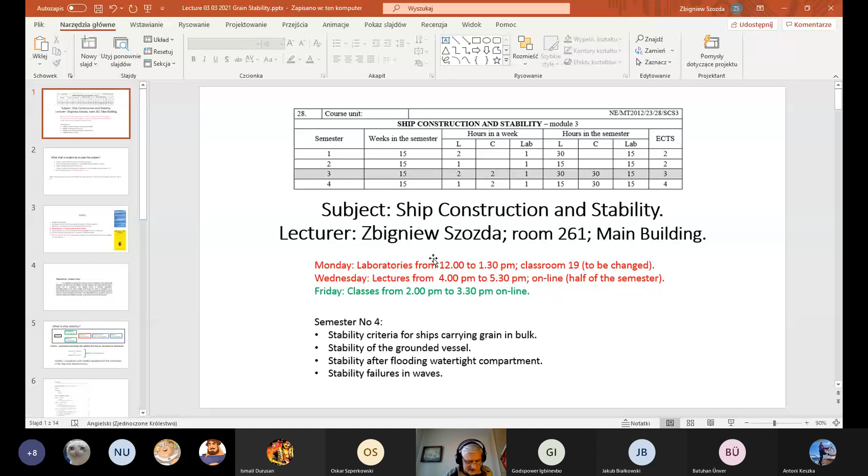Maybe 2 or 3 sentences about the structure of the semester. I know we discussed this when we met on Monday, but just to recall: semester number 4, 15 weeks in the semester. And what is the structure? Lectures, classes, and labs. 1 hour per week of lectures, 2 hours classes, and 1 hour laboratories.

Last time, on Monday this week, we did agree that we will meet all Mondays, starting from the first week to the last week. For the time being, we have classroom number 19, but I would prefer to change the classroom to another one, just to have the opportunity to have space or resources to use a computer at the end of the semester.

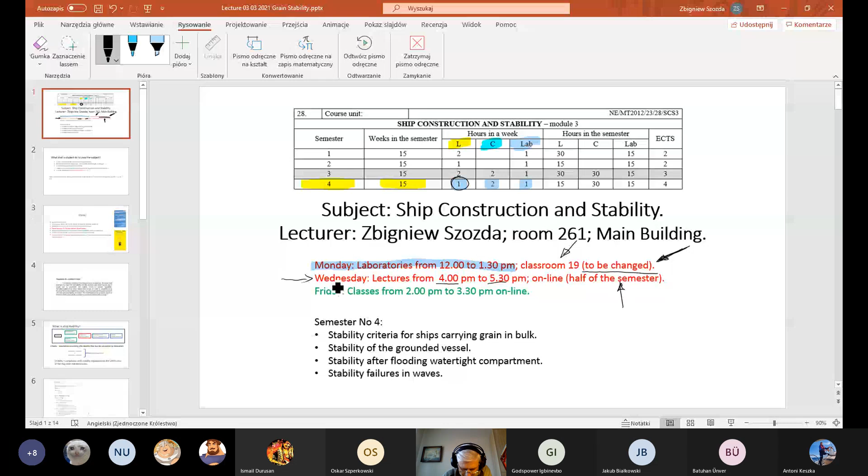Okay, then Wednesday, like today, lectures starting from 4 p.m. to 5:30 p.m. online. Please note, because there is 1 hour per week, if we start today and continue week by week, we will finish at the half of the semester. So please remember about this. The proposal was to have lectures week by week, and if we do so, we will complete the lectures at the half of the semester.

And this is my understanding of the conclusion from laboratories, and please confirm whether I am right or not. It means whether you have other obligations next Wednesday at that time, or you are free and we can continue week by week. Please confirm or say it is not possible.

Anybody? Hello, sir, please, can you repeat? I don't understand what you are asking. What are we confirming, sir?

Okay, so we have 1 lecture per week. But if we have lectures like today on Wednesday, starting from 4 and finishing at 5:30, so now we do 2 hours per week. If we do so continuously, we will finish lectures at the half of the semester. My question was, is it possible? Just to confirm, I did understand from Monday's meeting that it is possible for you to continue Wednesday, 2 hours, week by week.

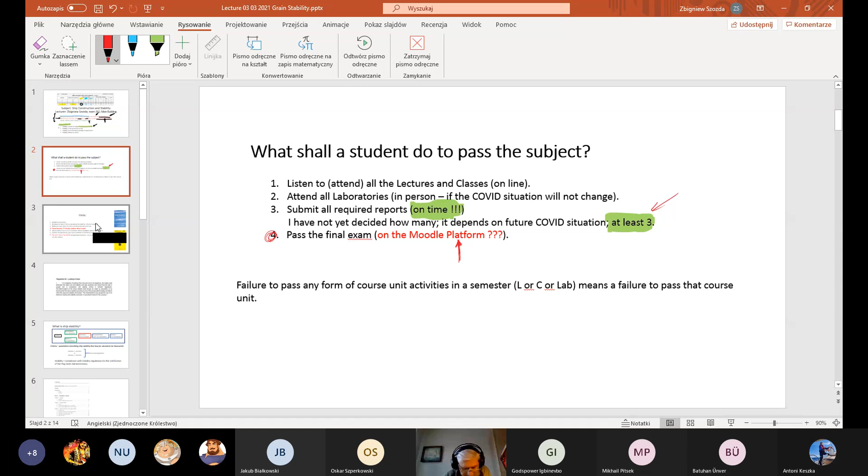Okay, what else did I prepare? This is the slide taken from previous semester. So what I suggest to do during this semester: first of all, keyword passion. Secondly, be always on time, not to postpone the task to the next week. So, for example, if we take today...

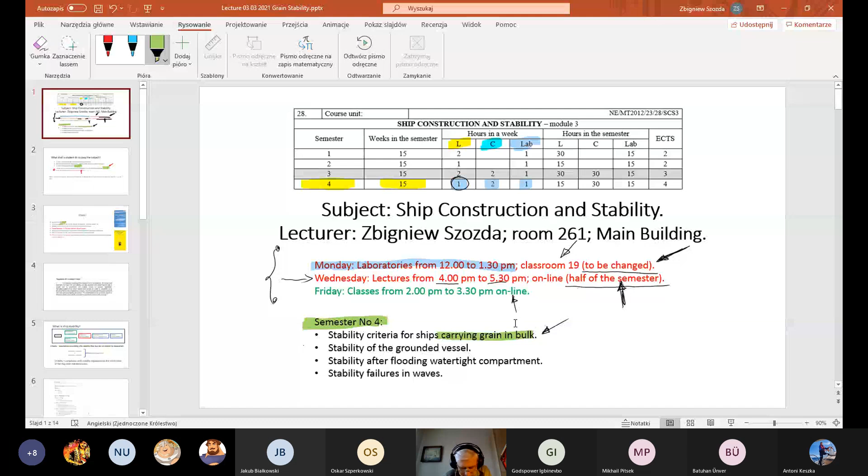Stability criteria for ships carrying grain in bulk - please be sure this Saturday or Sunday you do really understand the criteria for carriage of grain in bulk.

Make your notes. It is very important to have notes. If you make notes, you study and learn at the same time. Do all exercises by your own. For example, like last Monday, if you did your exercises by your own, you have added value - you really understand what is going on. If you just make notes following your colleagues, maybe the added value is not so big.

Okay, books - it is very important. If you have any book you can read related to our subjects, please do it. Two examples are shown on the screen.

If you don't understand anything, please ask questions. Asking questions has at least 2 advantages. First of all, I will answer your question. And secondly, this is also feedback for me. I'm talking now about a group, not a particular student - if you ask questions, it is also information for me about what I should stress in the future.

And of course, you have colleagues, and you can discuss different problems, different issues with your colleagues. Exercise and practice by your own, in addition to the mandatory task. If you feel that you would have added value if you calculate something by your own, please do it.

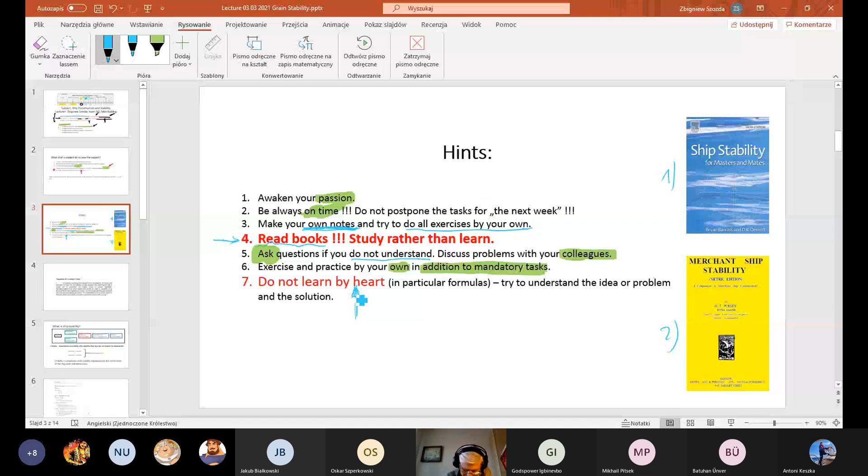And the last but not least, do not learn by heart. Don't learn by heart - you know my approach to our subject, we discussed this at least a few times. Try to understand the problem. I can remember you told me: if you have a formula, you will solve any problem. And then I gave you the formula like that, and we discussed what does it mean. It does mean nothing.

If you don't know what X means, what Y means, what Z means - it is at the same time the formula for how to calculate trim, TF minus TA. It is at the same time the formula for how to calculate righting lever, how to calculate initial metacentric height. It is the same formula for calculation of righting lever - still it is something minus something. Okay, the most important is to understand what X means, what Y means, what Z means. I hope you did catch my view.

Don't learn by heart. If you know what trim means, the formula for how to calculate trim is obvious. Okay, so it was my hint, and I reminded you because we discussed the same slide starting in semester number 3.

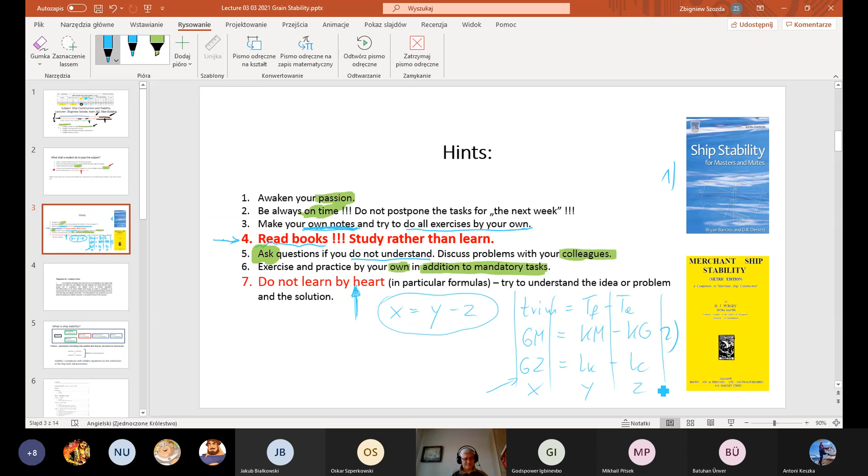Okay. So let us start with the problem, with the task. Now I show you Regulation 20. This is Regulation 20 taken from the SOLAS Convention.

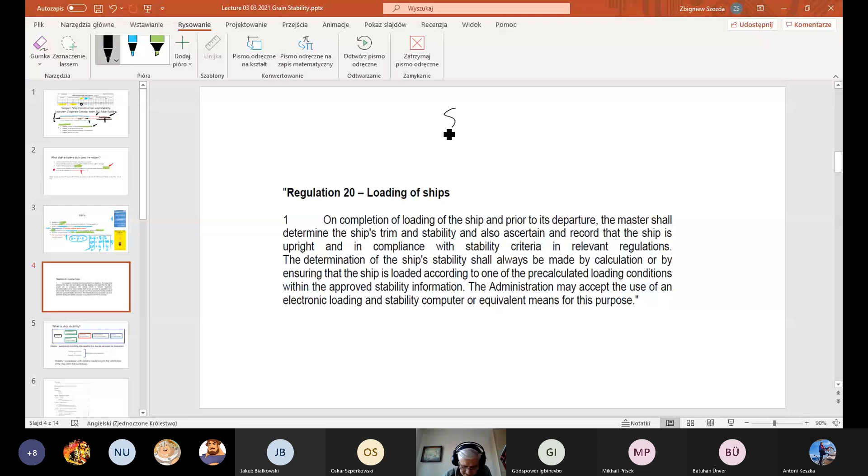And you should remember it, not necessarily word by word, not necessarily the wording, but the idea hidden behind this regulation. The master - it means you. It is my first keyword here. And in my opinion, from the perspective of today's lecture, the ship is in compliance with stability criteria in relevant regulations - and I would highlight relevant regulations for the purpose of this lecture.

What does it mean that the stability is correct? It means that you can, by calculation, ascertain by numbers - it is very important, by numbers - that stability criteria are satisfied. The ship is in compliance with stability criteria in relevant regulations. So this is also something what I wanted to stress and remind.

The next thing I wanted to remind from the last semester, number 3, is the question: what does it mean, stability, from our perspective, at least from today's perspective. And the definition I invented of stability for our purpose.

Stability, what does it mean? It means compliance with stability regulations. The ship is stable, the ship is safe. Maybe I should say the ship is supposed to be safe, prior to departure, if the loading condition, the shape of the hull, is in compliance with stability regulations.

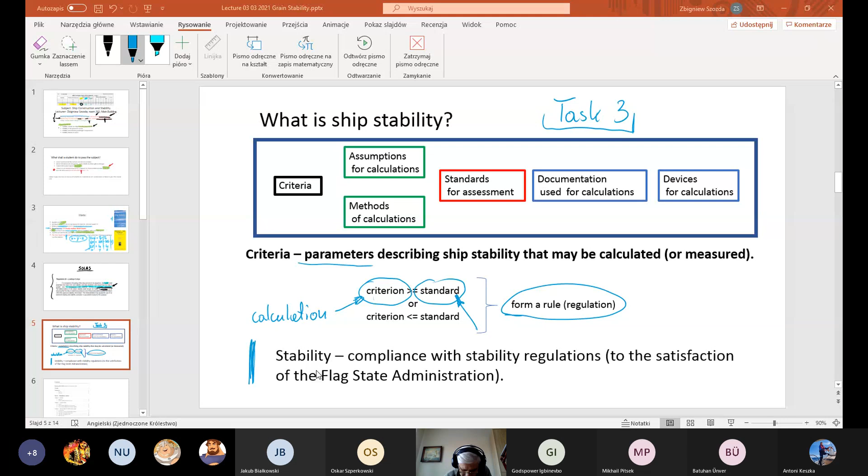Now I turn to a group who is the first on my list. The first is Robert Kipkacz. Robert, can you hear me? Robert Kipkacz, please say something. We can hear you, sir.

Yes, fine. The question goes to you, just to make sure everybody understands the structure. Could you please name any criterion taken from the previous semester? Can you name a criterion? What does it mean, criterion here? Just to check whether everybody understands what it means, criterion in this structure. Could you name a criterion?

Any? So, one of the criteria is area under the GZ curve between 0 degrees and 30 degrees. Then the standard is that the area should be greater than or equal to 0.055 meter radian. Very good.

So now you told everybody, assuming that maybe there is a student who didn't catch the point, what it means, criterion in this structure, and what it means, standard. Very good, thank you very much for doing this. Criterion, for example, area under GZ curve, and the standard is, like you said, 0.055 meter radian. This is understanding of this structure.

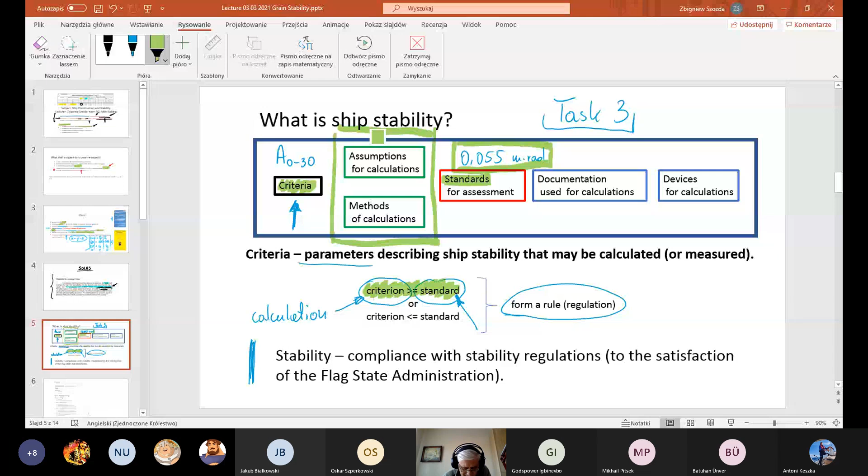Okay, assumptions for calculation, method of calculation. I hope you understand at the same time what it means, assumption, what it means, method. For example, defining the GZ curve, defining righting lever, we assumed that there are only two forces acting on the ship: weight and displacement. This was the first assumption we made during the third semester. This is a kind of assumption.

For example, we assumed that if you calculate the GZ curve, you have to previously calculate the vertical position of the center of gravity, KG, and multiply it by the sine of the angle of heel. One of the assumptions is that the vertical position of the center of gravity takes into account the free surface correction, which we calculated and discussed during Monday's laboratories.

So, for example, this is the next assumption for the calculation. If you want to take into account the phenomenon related to free surface, to liquids in partly filled tanks, we may assume that this phenomenon is described by the so-called free surface correction. I would recall the discussion of what it means, inertia moment of a surface, and so on. Method of calculation: if you calculate the area under the GZ curve, during last semester we used the trapezoidal method for this purpose.

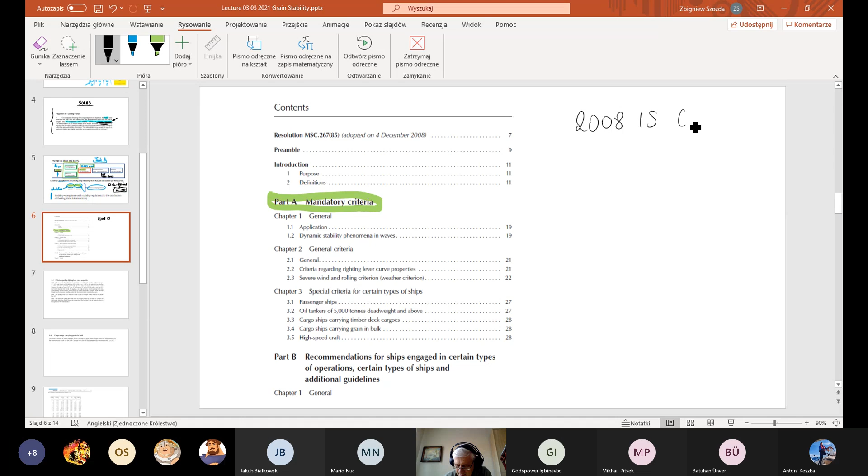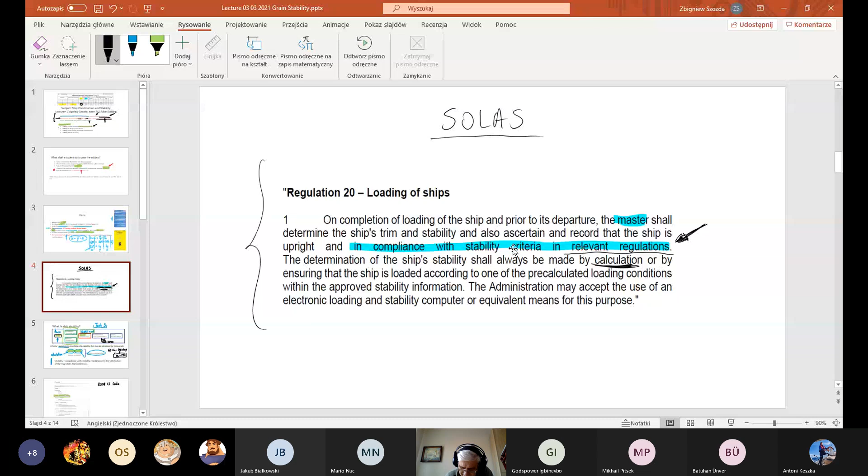Now I copied for you the content, actually part A, the content of the 2008 IS code. So I hope when I read this regulation number 20 and I stressed criteria in relevant regulations, I hope that you thought that probably relevant regulations, it is 2008 IS code, intact stability code, international code on intact stability of ships.

Okay, and I put here the content. This number, resolution number MSC.267, this is the number of resolution containing the code.

Please confirm, I am not sure at the moment, please confirm you can read words on the screen. Are the letters big enough to read? Yes, sir. Okay, yes, so they are. Super, thank you.

Okay, so content of the 2008 IS code, general criteria, chapter number 2. Chapter number 1, it is general statements like application, information about the dynamical stability phenomena in waves. If you follow me, waves and dynamical phenomena, this is the last issue we take on board during this semester. Okay, so we'll come back to this probably in May or June.

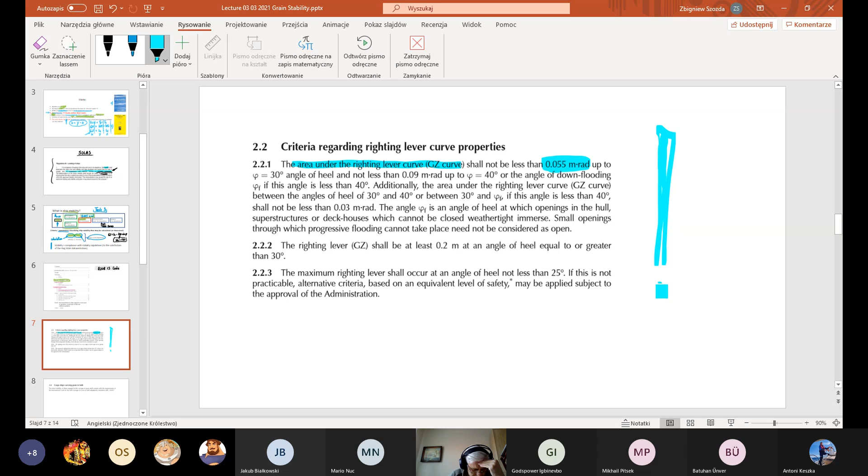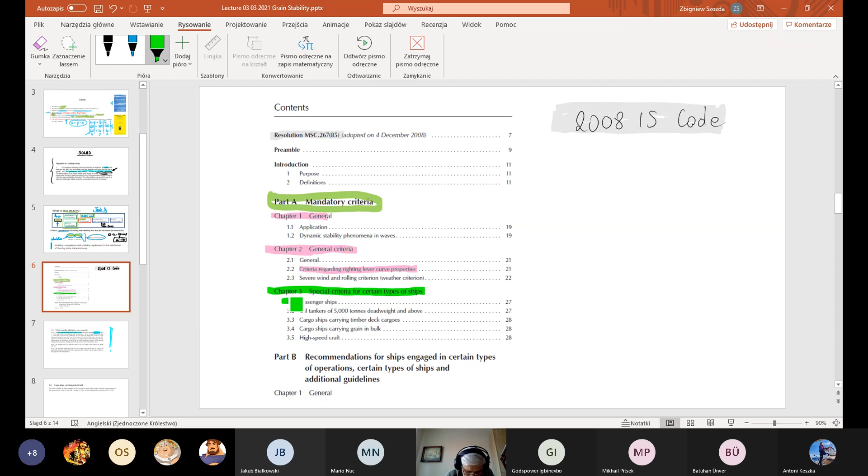But, and now I change color to green, there are special criteria for certain types of ships contained in chapter number 3. So chapter number 2, general criteria, applicable for all types of ships, and there are special criteria for certain types of ships. And if I remember correctly, last semester we discussed passenger ships criteria.

There was angle of heel caused by passengers crowding on one side, and there was angle of heel for ship in turn, and probably abbreviation here was phi R. So two criteria related to passenger ships. You can see the list.

The list consists of 5 types of ships: oil tankers, cargo ships carrying timber deck cargoes, and 3.4, cargo ships carrying grain in bulk. Cargo ships carrying grain in bulk.

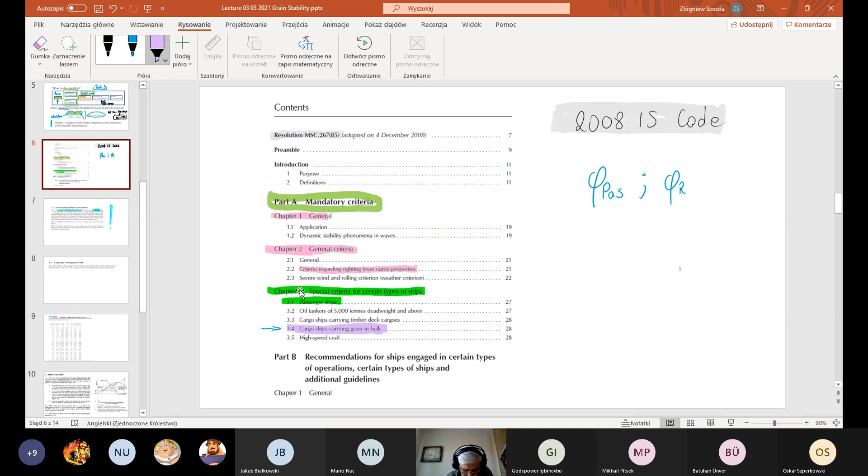So this is the problem for today. Special criteria for certain types of ships, and we focus today on cargo ships carrying grain in bulk. Grain in bulk. Chapter 3 and paragraph 3.4. Cargo ships carrying grain in bulk.

Now I will stop for a moment and ask the question. Now I turn to the group. Here at home I changed tablet from the presentation to Teams, and I turn to the group with the question, did you catch the point? Do you understand correctly where we are now? If you have a question, please ask.

I tried to follow to some extent knowledge from semester number 3, to summarize it from the main point, and now I'm intending to open a new chapter, criteria for grain in bulk. But before I do it, please tell me whether you understand the point or you have a question, just to be sure we are on the same footing.

No questions? Yes, sir. We catch the point about angle of heel caused by crowding of passengers and angle of heel when the ship is turning. I think we all catch the point, sir. So I'm not sure if I understand you correctly. So you confirm that you understand where we are now. Am I right? Yes, sir.

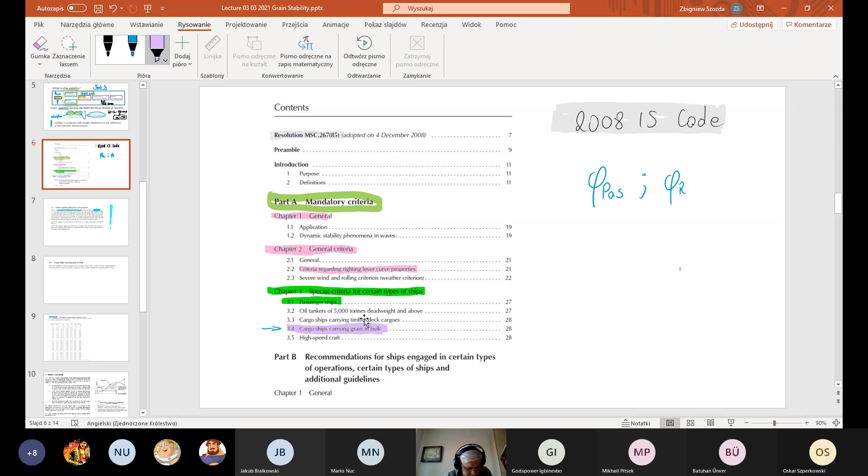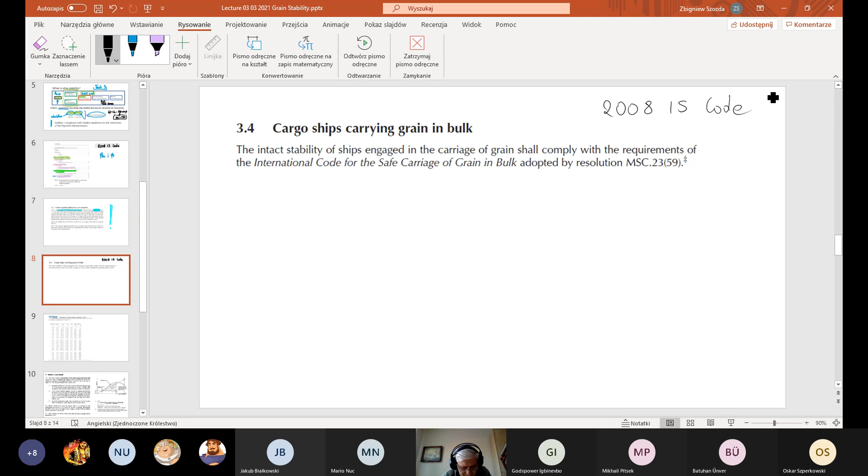Yeah, okay. So now we open a new chapter. We open chapter, criteria for ships carrying grain in bulk. And if you open the code, 2008 IS code, intact stability code, you will find that paragraph number 3.4, cargo ships carrying grain in bulk, is very short. Just one sentence.

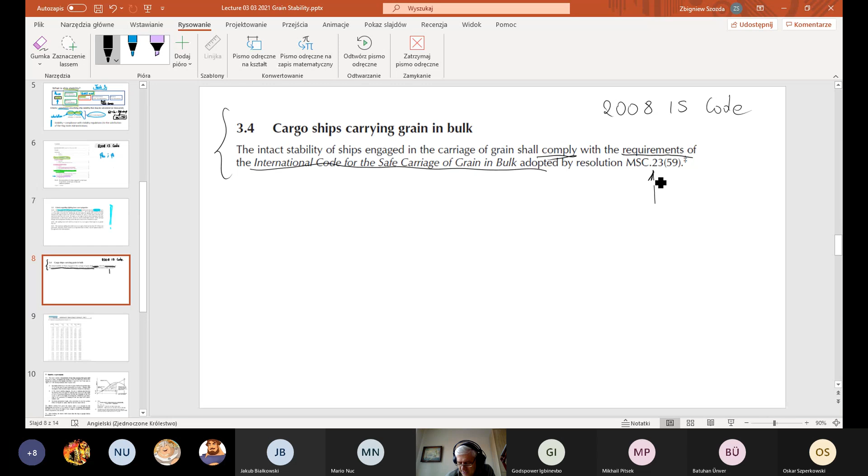The intact stability of ships engaged in the carriage of grain shall comply with the requirements of the International Code for the Safe Carriage of Grain in Bulk, adopted by resolution, and here you can see the number of the resolution.

So if you want to learn, if you want to study stability requirements for ships carrying grain in bulk, you should turn to the International Code for Safe Carriage of Grain in Bulk, adopted by MSC. Do you understand the abbreviation MSC? What does it mean? And the number of the document is 23/59. Do you understand MSC, this abbreviation? This is a question to you.

No, sir, I don't. Please, what is MSC?

It is Maritime Safety Committee. Safety. Okay, so... T. I'm not sure it is correct in English, double T or one T. Okay, it doesn't matter, it is not so important now.

Maritime Safety Committee. This is the committee of International Maritime Organization. International Maritime Organization consists of a number of different committees. One of them is Maritime Safety Committee, MSC, and this is the number of the resolution developed by Maritime Safety Committee. So this abbreviation is related to the structure of International Maritime Organization.

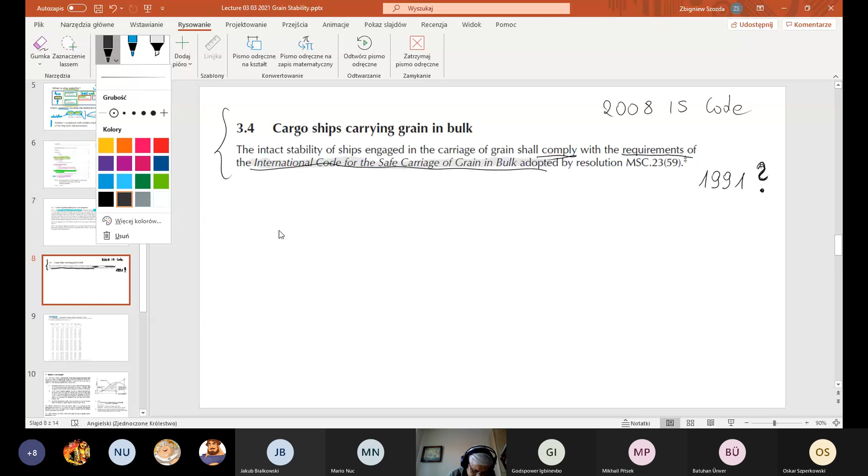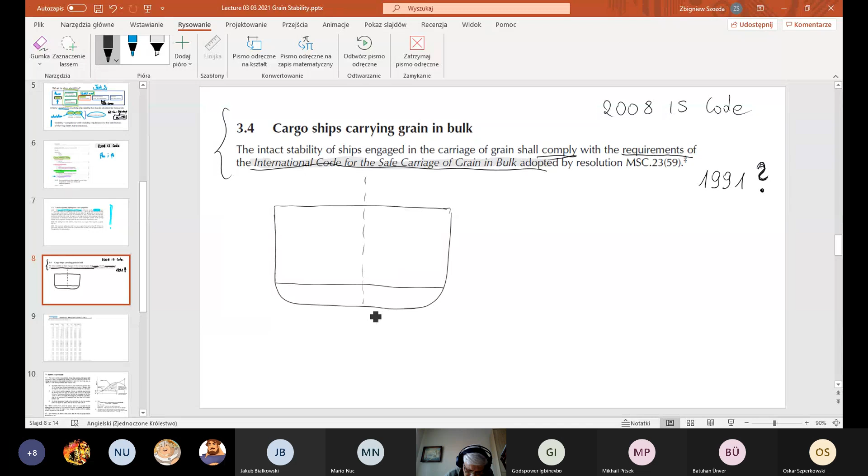What is the problem? The problem is very simple. If you have grain cargo in a hold, I'm trying now to show a hold. For example, it will be double bottom here, central line, keel, baseline, okay. And I change color to yellow. I will fill in the hold with the grain cargo. The hold is filled in with grain, and the hold is partly filled.

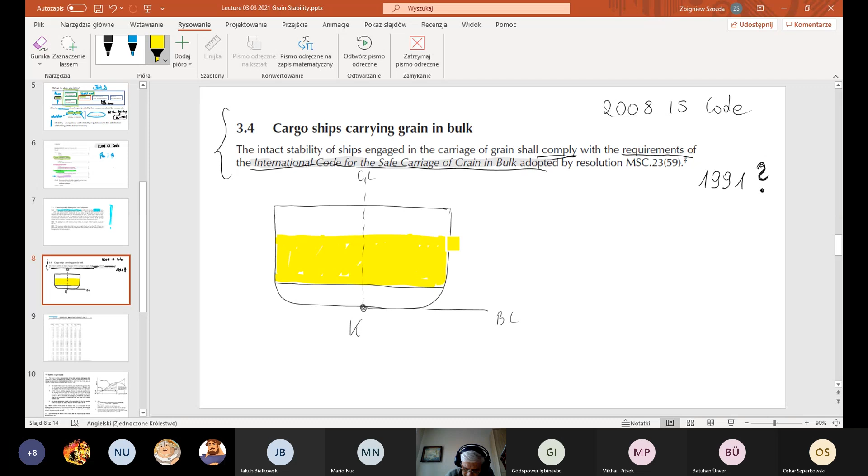And what is the phenomenon that we have to take into account? After some time, let's say two weeks of sailing, the surface of such grain in bulk in a hold will change position, and the new position will be like that. The grain shifts from one side to another side. It takes some time during the journey, for example after two weeks.

After some time, even if the grain cargo in the hold is trimmed, the surface of the grain cargo is parallel to the baseline on departure. Even if so, after some time, a volume of grain cargo changes position. The grain cargo shifts from one side to another side. Can you imagine such a phenomenon? It is important at this stage that you can imagine it.

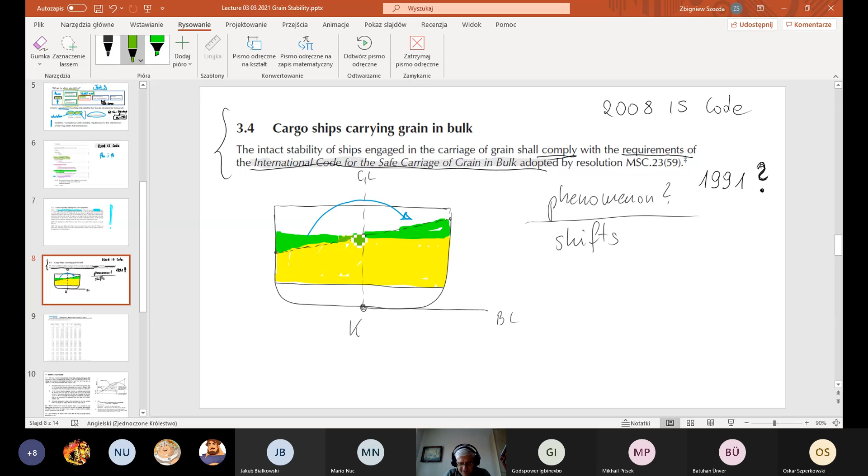At departure, you start your voyage with the level of the grain cargo, with the surface parallel to the baseline. You did load the hold evenly with grain cargo, but after some time, due to wave action, due to vibration of the hull, and due to accelerations of movements, different accelerations, angular, linear, some amount of grain cargo changes position. Cargo shifts from one side to another side, and this is the phenomenon. The grain cargo shifts from one side to another, and this phenomenon shall be taken into account if you assess whether your ship is safe or not from a stability point of view. It is very important to take this phenomenon into account.

Okay, and what parameter describes the phenomenon? The Maritime Safety Committee, MSC, introduced a new parameter which is called volumetric heeling moment. Volumetric heeling moment is the number that describes how much cargo can shift on what distance.

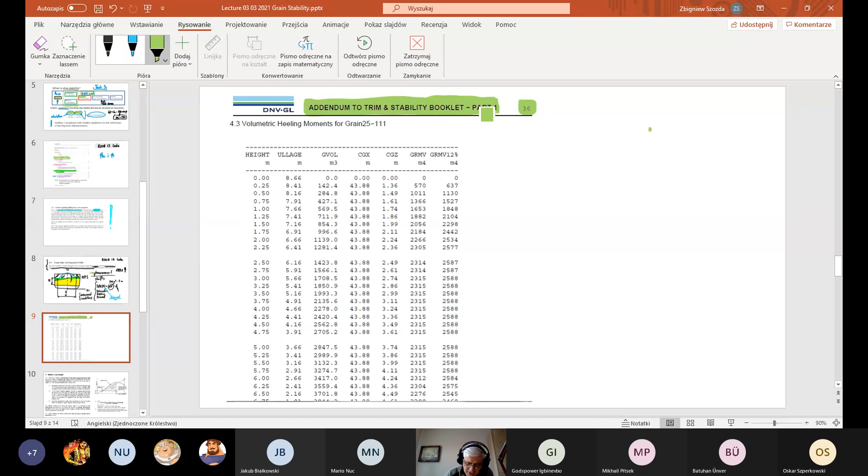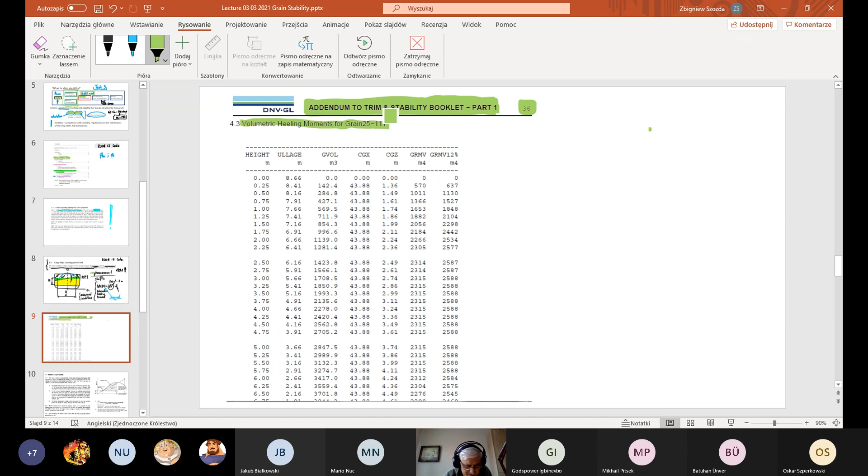Now I show you on the next slide, page number 36, addendum to trim and stability booklet, part 1. This addendum you may take from the Moodle platform, because I put this addendum there during the last semester. You can see page number 36 presents volumetric heeling moments for grain, and 25, 111, this is the position of the bulkheads.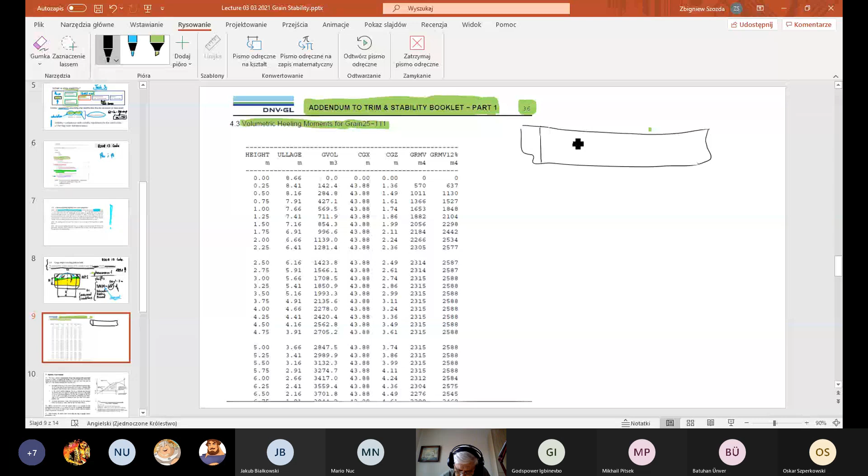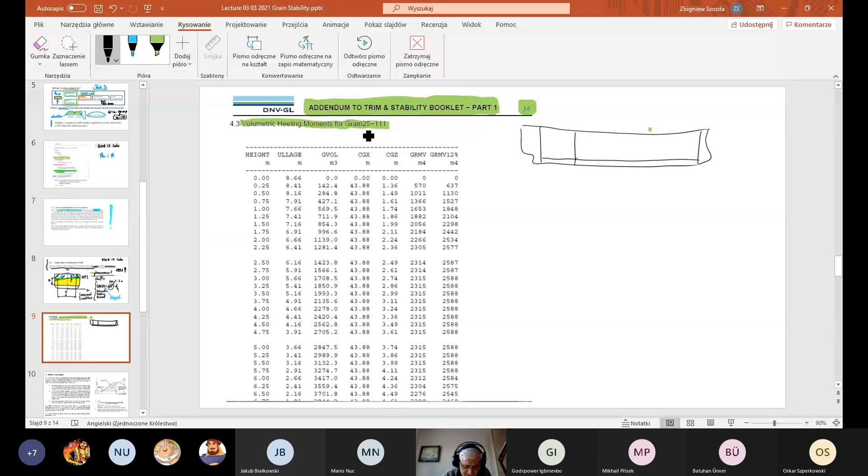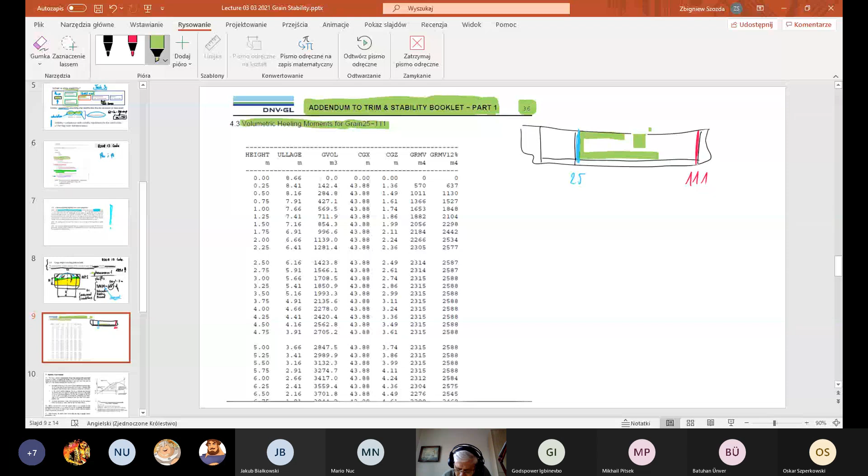Here, for example, that ship has movable bulkheads, so the bulkheads you can move. This is position of the bulkheads, at frame number 25. This is starting point, for example here, 25, and the next bulkhead is frame number 111. So the space, which is limited by the bulkheads, is like that. And for such space, they calculated.

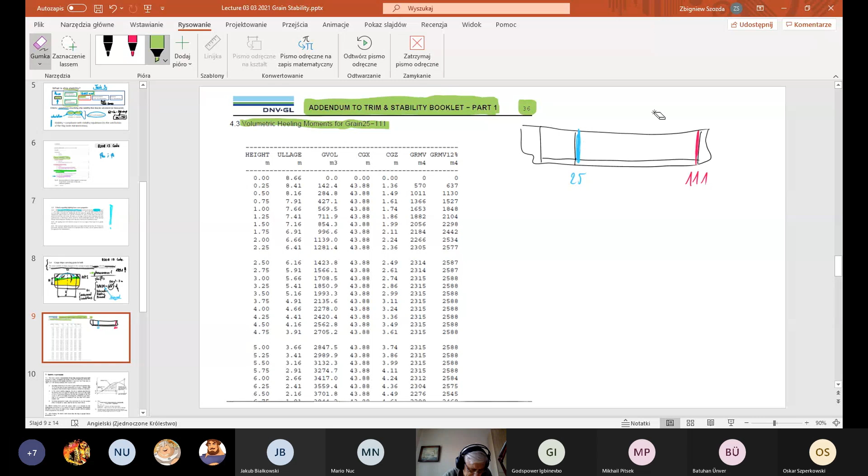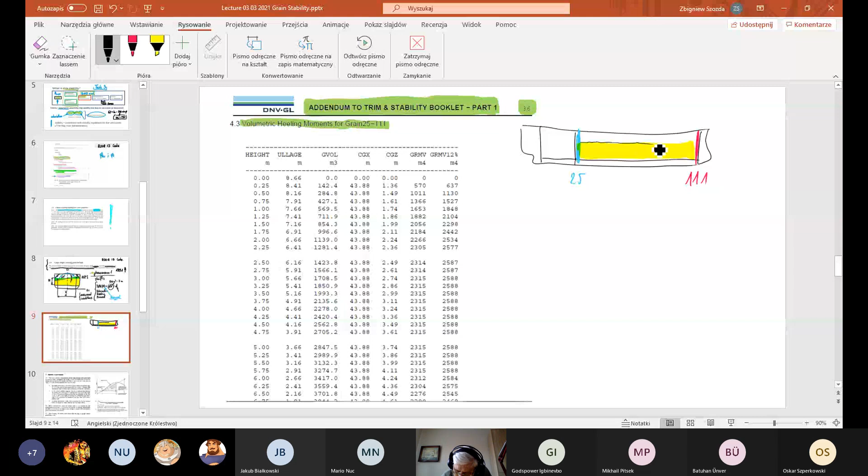Maybe I will change color, because I used yellow as grain cargo, and I will leave the hold filled partly, let's say 65%. So the level of the cargo in the hold is like that. Height, I will put H here. This is the distance between the tank top, double bottom, and the level of the cargo in the hold. This is H.

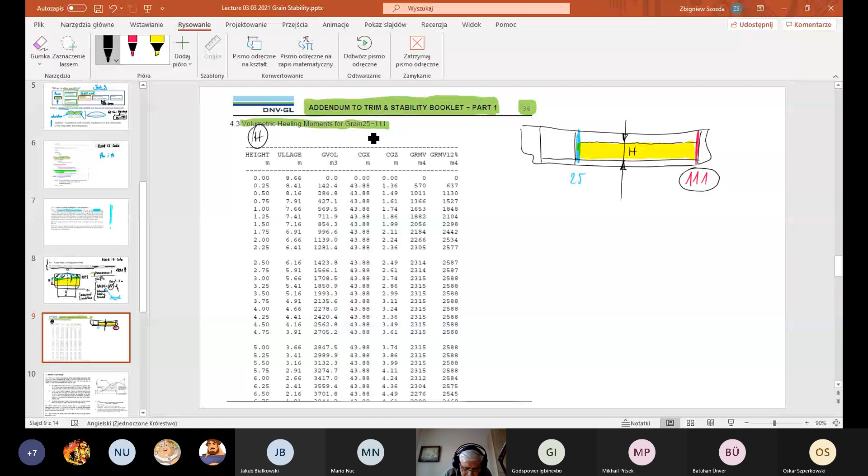111, this is the fore bulkhead. 25, it is the aft bulkhead on our ship. And the table developed by the shipyard, by naval architects, calculated, contains information about different particulars of the hold. Height is the first one. For example, height is, let's say, 5 meters.

Ullage, yes, this is the distance between the deck and the surface of the cargo. Yes, that's right. So it will be ullage. I will put here letter U. So if we add H and U, we should have the height of the hold. Am I right? Yes, sir, exactly.

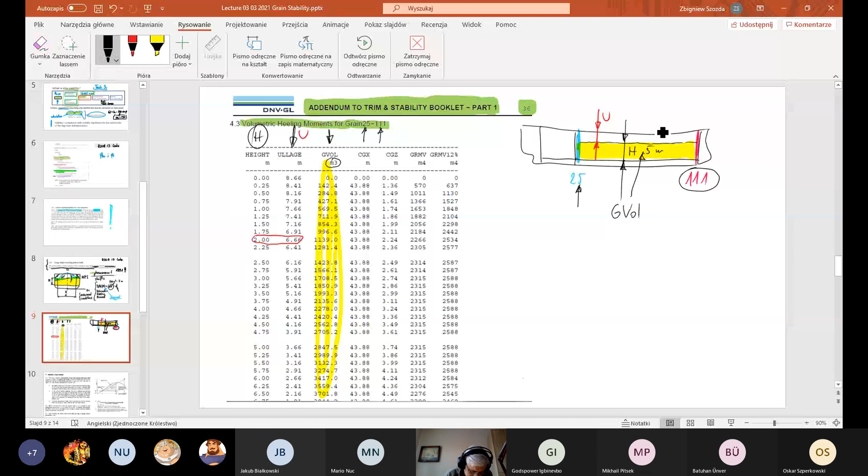How many cubic meters of the grain is contained in the hold if the hold is filled in to a particular height? For example, I suggested number 5. So if the hold is filled with grain cargo to 5 meters above the tank top, the double bottom, it means that the volume of the grain is 2,847.5 cubic meters, this number here.

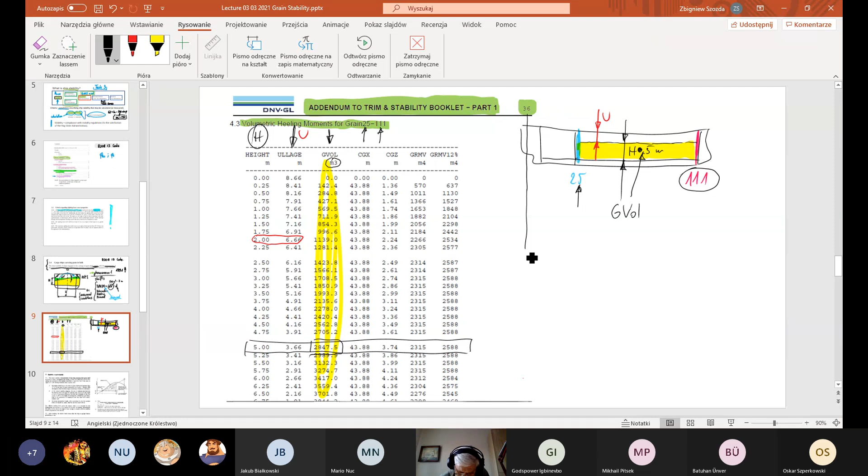Okay, the next number, CGX, CGZ. How do you think? What information is contained in these two numbers? That's the distance in the X and Z axis from the center of gravity of the cargo. Yes. So this is the distance, CGX, and probably the distance CGZ, center of gravity of the grain in the hold if the height of the cargo from double bottom is 5 meters. So 43.88, this is the X dimension, longitudinal, and 3.74, this is vertical. So this is the information here.

And GRMV, this is the same as volumetric heeling moment. Here they called it grain. R, I don't know what does it mean.

GR, I don't know—probably it is grain. M stays here as moment, and V as volumetric. So the abbreviation, maybe it's righting moment volumetric—no, for sure it is not righting. Actually, it should be heeling moment. If the cargo shifts from one side to another, it creates heeling moment. Do you agree? Yes, sir.

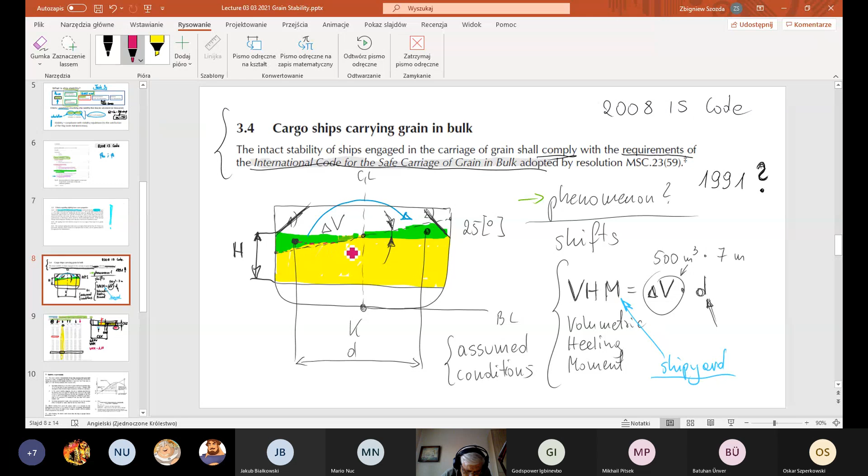If you observe the situation, I took into account transverse shifting of the center of gravity—letter D here. But in the actual situation, the center of gravity, after shifting, moved at the same time transversely and vertically. Can you see this? Here is D, and I put delta Z as vertical shifting of the cargo. So D could be like delta Y and delta Z.

Please focus for the moment on the green area here. If part of the grain cargo shifted from one side to another, the center of gravity moved transversely, D, delta Y—if we call this axis Y—but at the same time the volume shifted vertically, and I put here delta Z.

In stability calculations they assume—and this is an assumption, very important to note—that if we multiply volumetric heeling moment, calculated only transversely, by 1.12, so an increment of 12%, the phenomenon of vertical shifting will be taken into account. So the shipyard does not calculate the vertical change, the vertical distance of shifting of the center of gravity. They assume that calculating volumetric heeling moment transversely and multiplying by 1.12 accounts for vertical shifting. This is an assumed condition, an assumed situation.

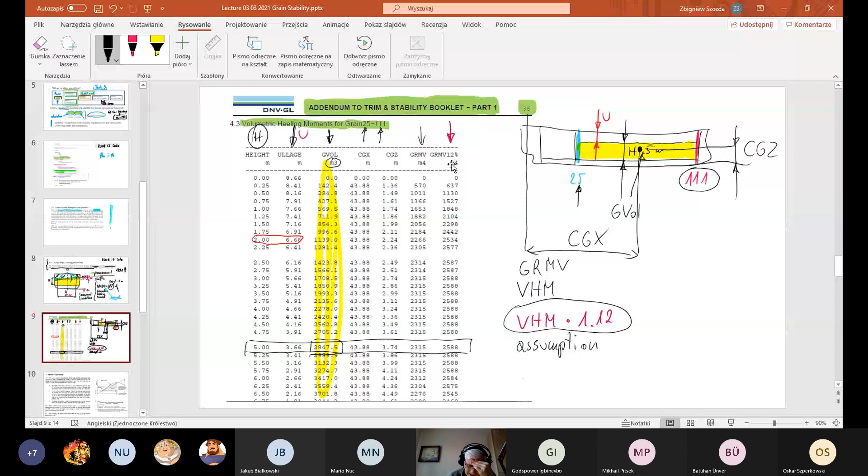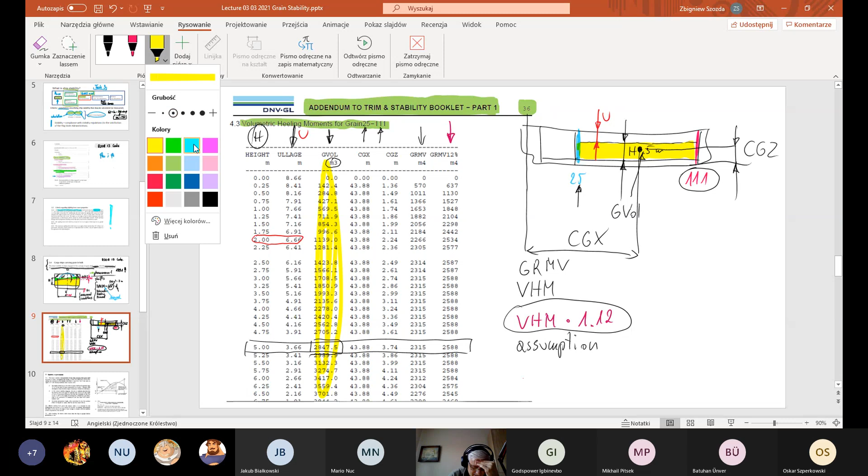So actually they calculate only transverse shifting of the center of gravity, D, and then to account for vertical shifting, they increase the result of the transverse calculation by 12%. This is the reason and the meaning of the column GRMV—grain moment vertical, increased by 12%, so vertical shifting of the center of gravity is taken into account. For your future calculations, you should use this column. Not only is vertical shifting taken into account, but also transverse shifting at the same time. To simplify calculations, they assume vertical shifting increases the moment by 12%.

Okay, so I tried to explain the phenomenon. To describe shifting of the cargo, they calculate volumetric heeling moment—this is done by the shipyard—answering the question: how much volume shifts, on what distance? Then they multiply it by 1.12 to account for the fact that at the same time the grain cargo shifts vertically. As future master, you have the so-called volumetric heeling moment for a particular hold given in ship documentation. In our example, this documentation is called Addendum to Trim and Stability Booklet, Part 1. You can find volumetric heeling moments as data for your calculations in the stability booklet, actually in the addendum.

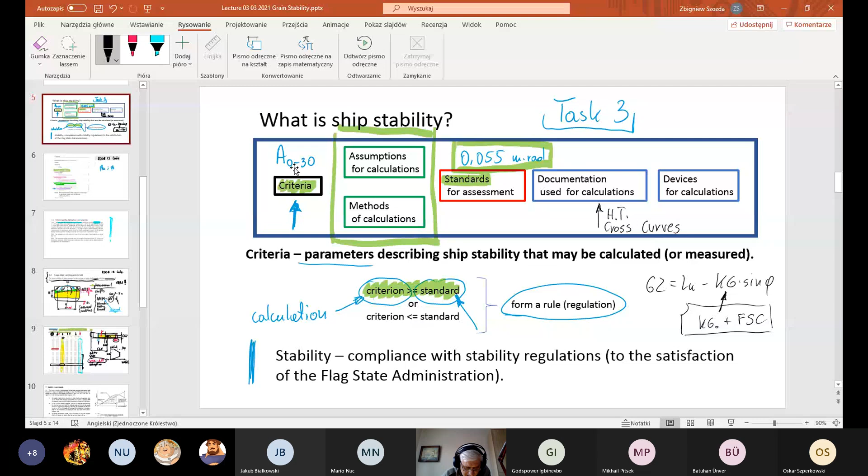I am looking at the clock, 20 minutes in front of us, so I have to turn now to the criteria. I explained the phenomenon, I explained the source of data for calculations, but now I have to focus on criteria. What criteria are used for stability assessment if the ship carries grain in bulk?

Now, the quality of letters is worse than usually, but I wanted to show you the wording just as it is in the code. So I just took the grain code and copied for you parts of it.

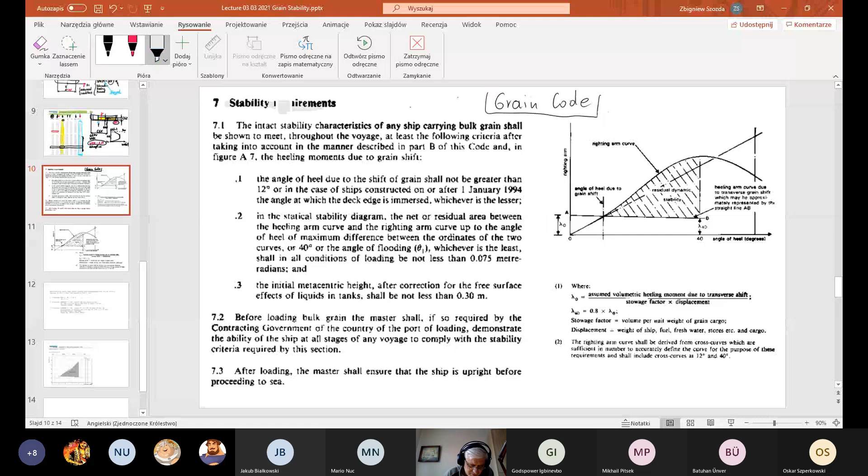If you read the grain code, as I showed you previously, you will find chapter 7, stability requirements. Now let us read slowly the stability requirements during carriage of grain in bulk.

Before I start, I have a question. Please confirm, can you read the text? Is it possible for you to read the text? Yes, sir. Fine, yes, sir, thank you. Okay, very fine.

Intact stability characteristics of any ship carrying bulk grain shall be shown to meet throughout the voyage at least the following criteria.

After taking into account, in the manner described in part B of this code and in figure A7, the heeling moments due to grain shift.

So a heeling moment exists, and it causes heeling of the ship. And what are the criteria? The first criterion is the angle of heel. It should not be surprising due to shift of grain.

The angle of heel due to shift of grain shall not be greater than 12 degrees, or in the case of ships constructed after 1st January 1994, the angle at which the deck edge is immersed - so deck edge immersion, whichever is less.

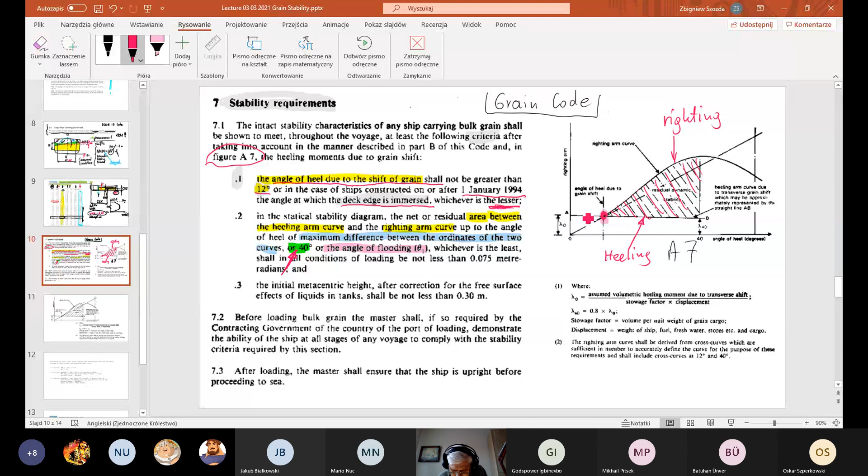Usually we start from the point of equilibrium between the heeling arm - here is the heeling arm curve - and righting. We have two curves: the righting arm curve, I hope everybody can calculate this curve, and the second one, maybe I change the color to green, is the heeling arm curve.

The area between is limited by the angle of equilibrium and the least angle, which is taken from when the difference between the ordinates is maximum - probably in our case this is that angle here, where there is maximum difference between the ordinates of the righting and heeling curve - or 40 degrees, or the angle of flooding.

Usually for an average ship, the angle of flooding is bigger than 40 degrees. But if you have a special ship where the flooding angle is smaller than 40 degrees, we have to limit our area using the flooding angle. So the second criterion, number 2, is the area between the two curves, righting arm curve and heeling arm curve.

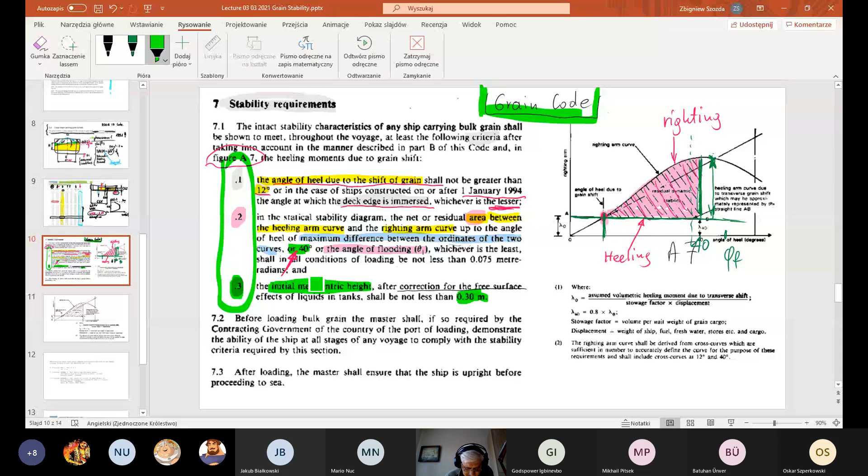To sum up, what stability criteria are applied for carriage of grain in bulk? Two additional to those we spoke about last semester, number 3. The first criterion is angle of heel. The second criterion is area. And the last one is initial metacentric height.

I didn't say about criterion with regard to area. The standard here is 0.075 meter radians. Okay, I didn't say, so now I'm back to this criterion. If you calculate area between righting and heeling curves, starting from point of equilibrium and ending, let's say, 40 degrees, the result of your calculations shall be not less than 0.075 meter radians.

Paragraphs 7.2 and 7.3, I think they are obvious to everybody. Maybe I will show you keywords here. The master, as usual - master, it means you in the future. You shall - what is your responsibility? Demonstrate. You shall demonstrate the ability of the ship at all stages of any voyage to comply with the stability criteria required by this section. This section, I understand, section number 7, namely paragraph 7.1.

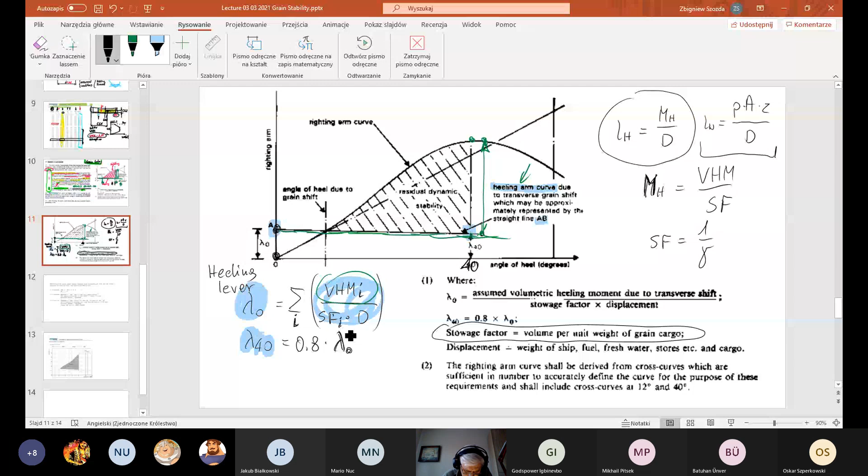And now I turn to the next information. If the number of holds is bigger than 1, you have to sum up all holds starting from the first one and ending with the last one.

VHM, volumetric heeling moment, may be found in ship documentation as a function of height of the level of cargo in a hold, in a particular hold. So this number is from ship documentation. Stowage factor is given as a description of the cargo, this grain you intend to load, and displacement is just displacement, sum of all weights loaded on the ship, including light ship weight, empty ship weight. Okay, I think I concluded.

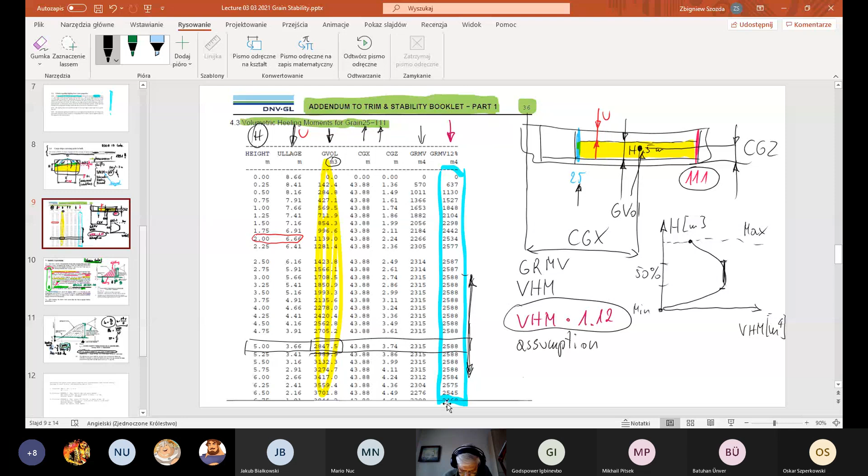And now I turn to the group, whether you manage to catch the point and understand the phenomenon first of all, and the method of how ship operation deals with the phenomenon. They decided to introduce an additional factor, an additional number that describes the phenomenon, and they decided to introduce 3 additional criteria. Actually, the set of criteria is the same as previously for any other ship, but the method of calculation is a little bit different. A little bit different, meaning the heeling curve, actually heeling line, because it is in fact a straight line.

The heeling line is taken into account in such a manner. In my opinion, it is a little bit similar to the weather criterion, if you remember LW1, LW2, and area B. So it is more or less the same, but the factor heeling the ship is different, so the method of calculation is a little bit different, and the criteria are a little bit different.

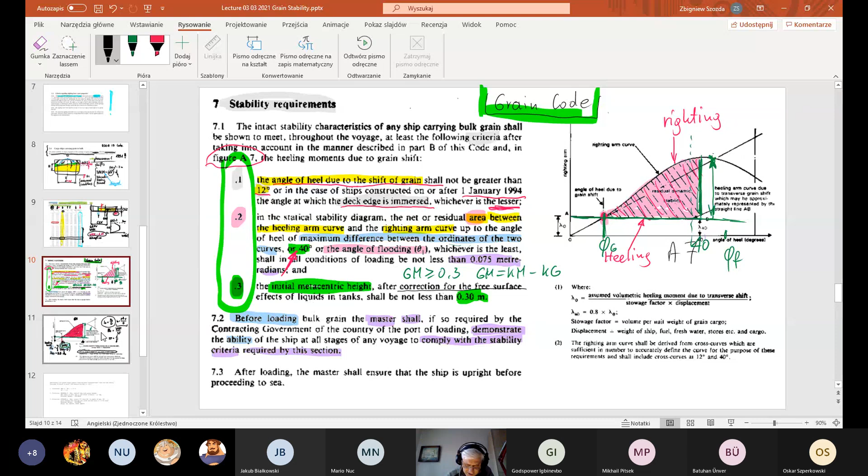Two criteria. The first one is angle of heel, angle of equilibrium, Phi grain, and the second criterion is area under the curve, actually between two curves, heeling and righting. Two additional criteria you have to calculate prior to departure, and the third one is GM, initial metacentric height. Package of three additional criteria: angle of heel, the second area, and the third initial metacentric height. And the method of calculation of equilibrium, angle of heel, and the method of calculation of area.

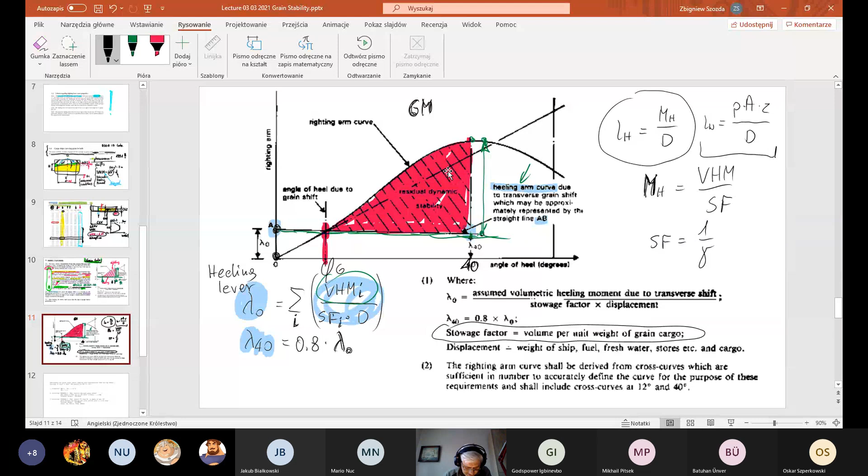Probably on Friday we'll try to calculate something using numbers, not only general information but also numbers. And now I turn to the group before I stop recording, whether at this stage I need to add something, or maybe everything is clear for you. I turn to the group, whether you have additional questions before I stop.

Hello, sir. Hello, Godspower, probably it's you. Yes sir, it's me. It's clear, the explanation and the drawing and everything. I think it's very clear. Just to cram those criteria, the details, to cram it about each of those points. I think that's maybe what would be hard, but the general point is understandable. I think so, just fine. To take note of the criteria, that's just the point.

So I think if anybody is not sure how to calculate, maybe a good idea to take numbers on board on Friday in frame of classes and just calculate angle of heel, area, and initial metacentric height, taking into account a particular loading condition and particular ship. Was it your point, Godspower? Yes sir, yes sir. No, fine. Okay, so let us be prepared for calculations on Friday.